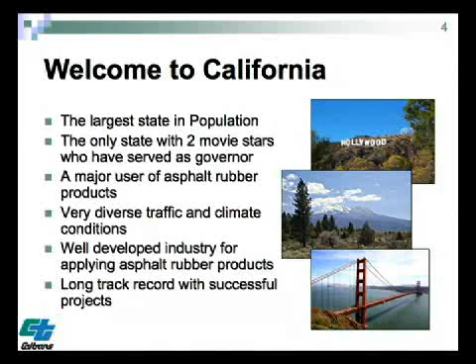We have a very large population here in California, and we have so many tires, of course, and we need to utilize rubber in our pavements as well as in many civil engineering applications. To our fortune, we have been doing a lot of research in this area, and we have determined that asphalt rubber is a prime or premium strategy that we can use in various applications, from maintenance and pavement preservation applications, to design and rehabilitation.

We have a well-developed industry here, and we are also fortunate that we have plants and people that have devoted a lot of effort with a lot of passion to make asphalt rubber technology succeed in California.

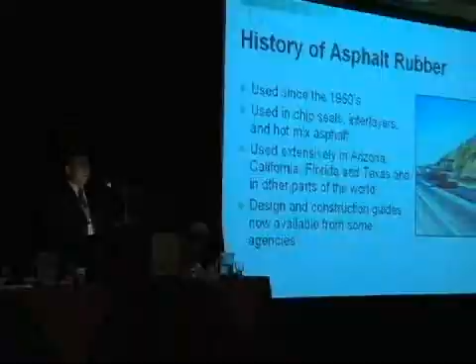Our history goes back to the 70s and the 80s. In the 60s we started playing around with chip seals, interlayers, and hot mixes. In the 70s, then into the early 80s, we started with overlays and did the Ravendale project. That was the cornerstone for California, where we built test sections in 1983 in Ravendale, Northern California, with various asphalt rubber strategies. We have done a lot of evaluation of those projects.

Based on those projects, we have developed guidelines and started utilizing asphalt rubber in many applications. We have developed design and construction guides, and developed many approaches to how to deal with asphalt rubber based on our experience and dealing with the sensitivity of this material. That's part of some of the problems that have been encountered in many states, and that slowed down the progress of moving toward the implementation of asphalt rubber.

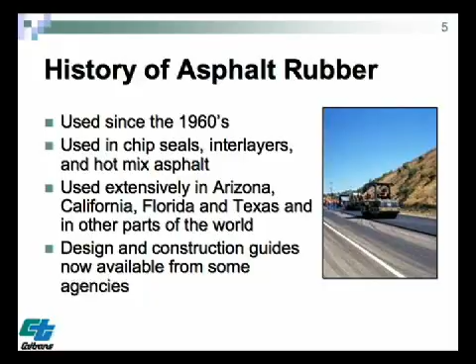But many states - I would like to give credit to Arizona also, which has been a pioneering state along with California, as well as Florida and Texas. Of course, many countries have utilized asphalt rubber, and we have also built on the experience of countries like South Africa. We have had a cooperation with South Africa through the Heavy Vehicle Simulator Accelerated Pavement Testing Program, where we have developed mutual projects and more understanding of the behavior and benefits of this technology.

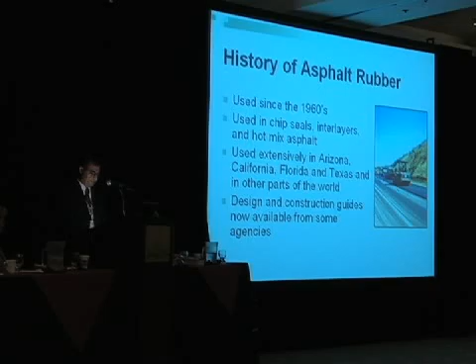Of course, we've also had legislation in this country - ISTEA was mandated in 1991, where all agencies were mandated to use asphalt rubber, and there were some problems and, of course, successes. I know a lot of people dwell on the negativity of the mandate, where many states who put in trials had problems because they treated asphalt rubber just like conventional material. There were no controls, there were failures, there were problems. So many people look and dwell on those negativities. However, ISTEA pushed the research in asphalt rubber and investigations, and was the catalyst to much of the asphalt rubber movement in this country. So there was a lot of positivity to this, and we have to thank ISTEA for this.

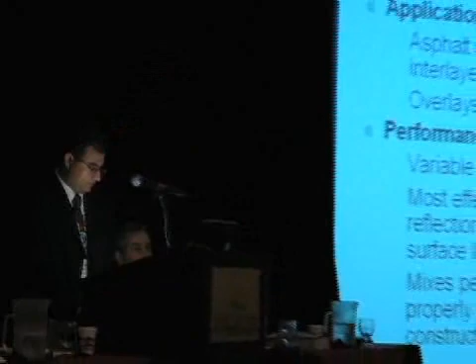The history of chip seals, overlays, and reflective cracking behavior of asphalt rubber has been tremendous. It's the best material we've seen in our applications. That's why we use asphalt rubber, that's why asphalt rubber is cost effective. We've been able to use it at reduced thickness for reflective cracking, and we've used it for structural overlays as well. We have many projects in California that have had many successes.

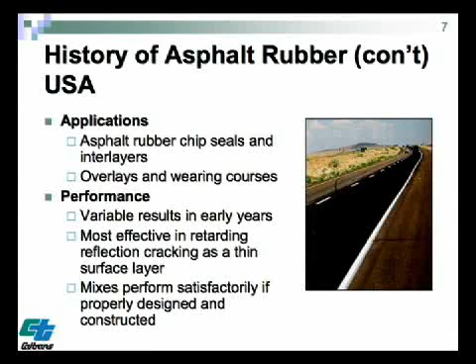We have various types of applications like asphalt rubber, gap graded, open graded. Also, we have asphalt rubber hot mix, open graded with high binder, where we put so much binder in the mix, and that basically gave us a premium strategy to use a durable material that can last many years.

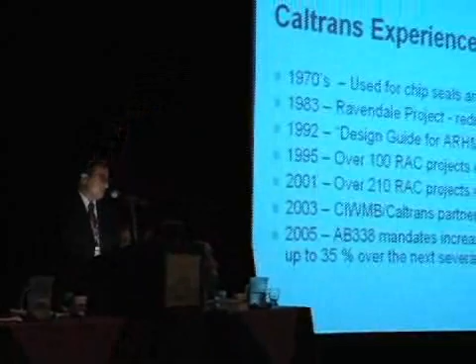This is just a listing of some of the history we have here in California, from chip seals to the Ravendale project, to the development of the design guide for structural and reflective cracking in 1992, to the projects that were constructed and evaluated at various times - 1995, 98, 2001 - and the partnership with the California Integrated Waste Management Board in 2003, and the mandate of AB 338 to increase crumb asphalt rubber usage up to 35% over the next few years.

So we are moving and pushing asphalt rubber because we believe asphalt rubber is the strategy to use. It's a premium strategy to use, and it is cost effective.

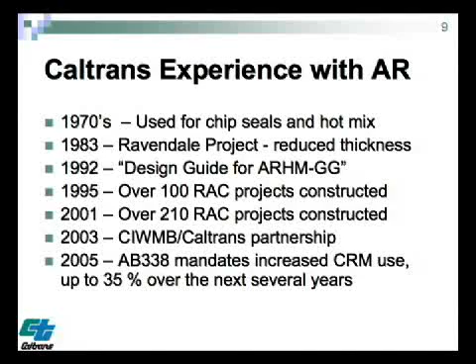The tire used in asphalt rubber, what you call RAC or rubberized asphalt concrete, that has been the term used in California. Since 1997 up to 2004 I have the statistics - it's a tremendous increase. We have used over 12 million tires in asphalt rubber.

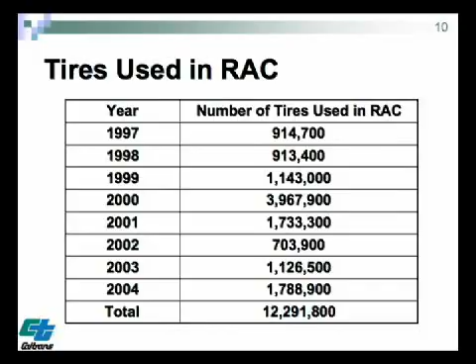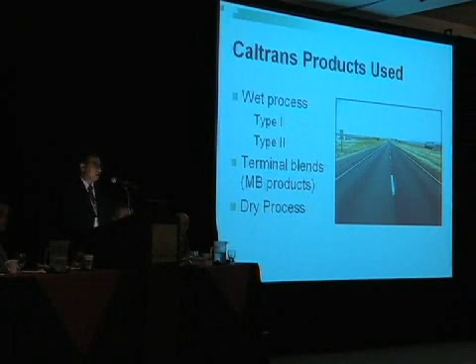The processes that have been used: you have the wet process, you have the terminal blends we've been trying in California as well, and you have the dry process. California has been using mainly type 2, which basically has the extender oil. I know Arizona uses type 1. We've been having successes.

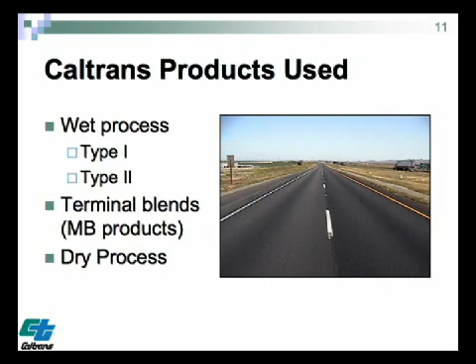And of course, we have used the Accelerated Pavement Testing Facility, or the HVS, the Heavy Vehicle Simulator. We had a partnership with South Africa in 1992-93. We did some trials in South Africa with the California mix designs, and that validated the reduced thickness design. We then brought the equipment to California, where we have 2 HVSs, one at Richmond Field Station at the University of California, and another testing field projects.

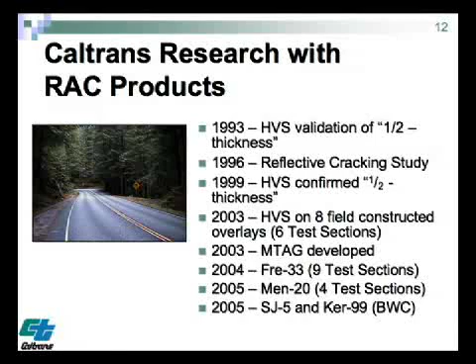We had a reflective cracking study where we developed a reflective cracking device, and we compared the asphalt rubber in the laboratory with densely graded asphalt concrete and also with various materials. We found that the reflective cracking behavior in the laboratory exceeds 10 times that of conventional mixes, and that also validated our field trials. So that gave us the confidence.

So we have the laboratory, the heavy vehicle simulator, and the field trials. And we developed guidance, of course - we have the MTAG, the Maintenance Technical Advisory Guide, and the Asphalt Rubber Usage Guide. The Maintenance Technical Advisory Guide, for example, is being used now, adopted by the Federal Highway Administration to be used nationwide.

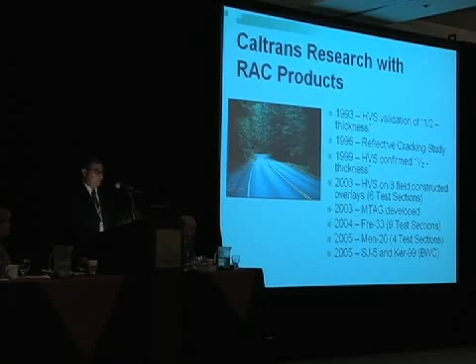The modified binder spec, which also uses rubber, has been tried as well under the heavy vehicle simulator, and the studies are underway.

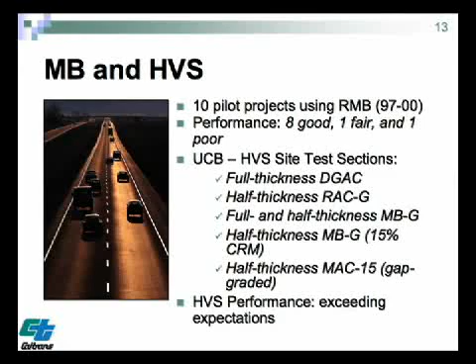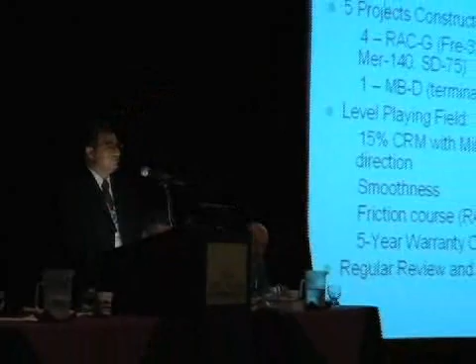We have also developed a warranty program in California where we used 5-year warranties for overlays using asphalt rubber, requiring 15% minimum rubber in the binder. We included smoothness requirements, and we have various types of overlays, including the open graded, which we believe is one of the premium strategies - giving us good reflective cracking resistance, as well as reduced splash and friction benefits. So there's a lot of benefit to this type of strategy.

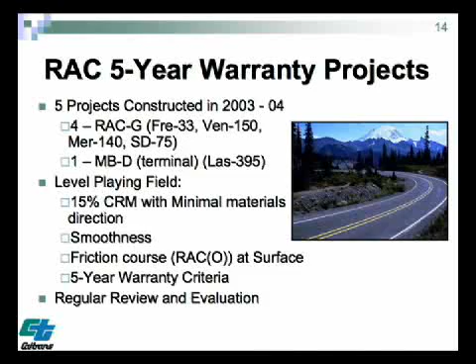We recently also have a noise program, the Quiet Pavement Program, a major program in California where we have many trials now testing various types of pavement surfaces and taking noise measurements. We found that the open graded asphalt rubber has given us a reduction in decibels by about 7 when compared with PCC pavements and other pavements. So there's a lot of benefit to open graded, and in particular when you add asphalt rubber, it gives you the durability we need for long-term service life.

These are just examples of some of the projects we're using recently, and we're doing a lot of evaluation. We have a paper coming up later on Friday about the asphalt rubber chip seal evaluation in California, and some of the changes in specifications we will be making, because due to the sensitivity of the material we developed the experience and guidelines in order to ensure successful performance.

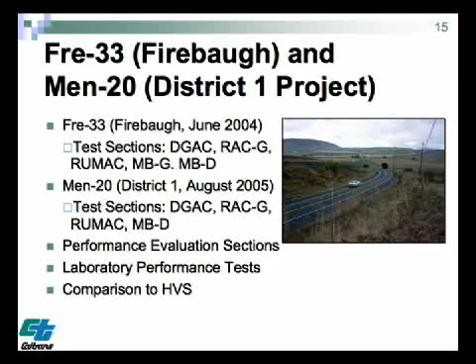We've talked about the durability of the material. We have environmental benefits, the ability to use asphalt rubber in interlayers - we call them SAMIs, stress absorbing membrane interlayers - chip seals, as well as in hot mixes. So we have a tremendous use for it in maintenance, rehabilitation, and in design.

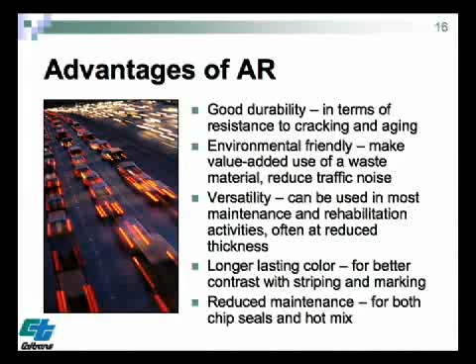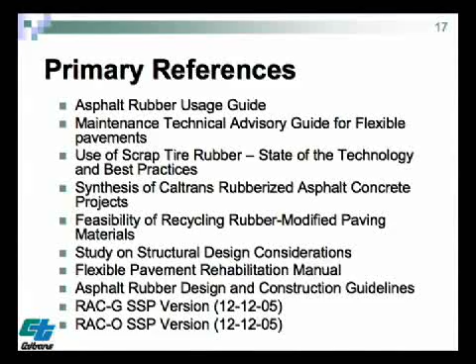These are the references which I mentioned - the Asphalt Rubber Usage Guide, and we have copies of it. Everybody has a copy of this recent one. There will be a presentation in the application track on it. There's the Maintenance Technical Advisory Guide, the MTAG, which you can look at on the internet at the Caltrans website. And the feasibility of recycling rubber - I know this is a subject everybody is interested in - and many specifications have been developed and are available for anybody to use on the Caltrans website.